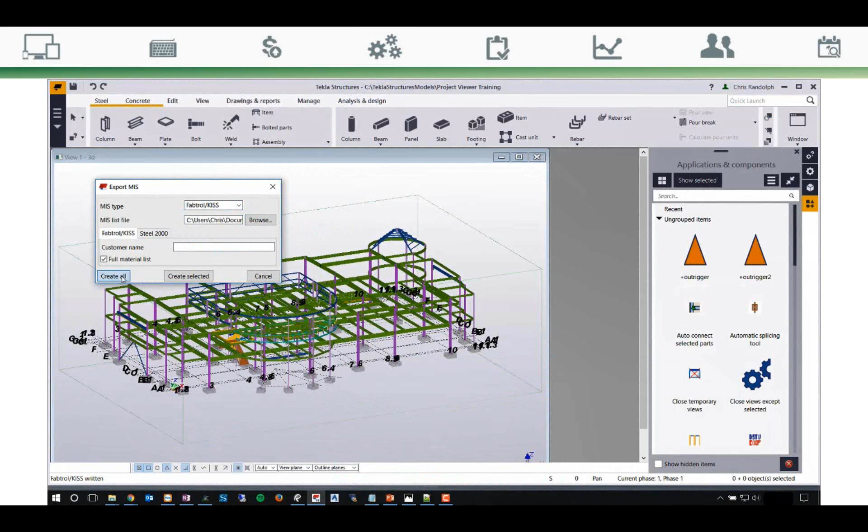We go to our file menu, select export, and MIS. We select the KISS option, and we'll save our file. I'll create all to run this on the entire model. And that's it.

Now we're going to Fabsuite and we're going to import our KISS file. We go to the file dropdown, under estimating we select the KISS format, and we'll browse for our KISS file.

When we click import, we're taken to the estimating job edit window. We'll enter some information for this project - for example, here I'm the estimator. I'm going to change our shop efficiency to 100%. If you want to change your job number, job name, any other information, you can do that here also.

I'm not using any movie magic here, I just want you to see that the import doesn't take long at all. We have a few little errors that Fabsuite found - these look like concrete pad, footing, slab, nothing that we're concerned with. So it looks like we should have a good import here.

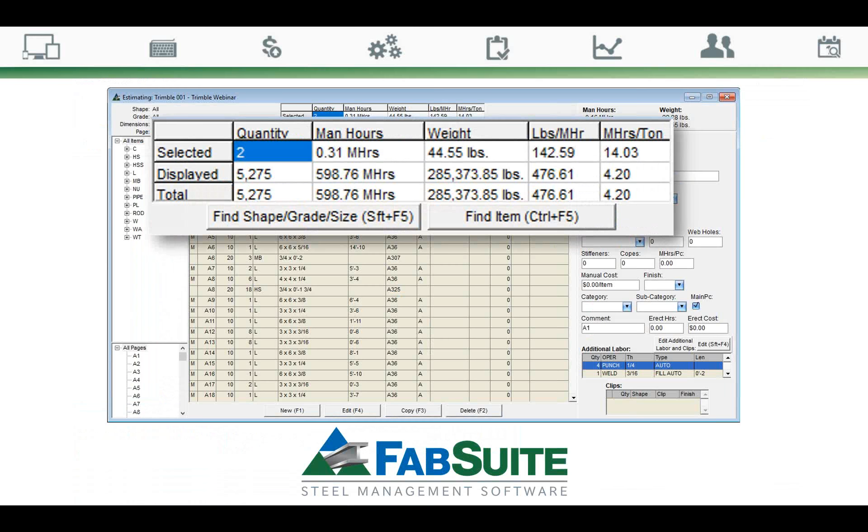If you want to see more detailed data, you can hit Control-D on your keyboard, or go to the estimating drop-down and select View Labor Details. We see a breakdown of how the man-hours were calculated for the selected material and for the job. We have time for unloading and loading, cutting, time to punch, weld, and more, depending on whatever you have customized for your shop.

Also note at the bottom right, the additional labor display - this shows what actions will need to be performed on the selected items. Because we have this information from the KISS file, we don't have to change the labor code. If you've used Fabsuite and done a manual estimate, you've probably gone in and added labor codes for the material you've added. When you use a KISS file, you don't have to, because the KISS file has provided all that labor information for you.

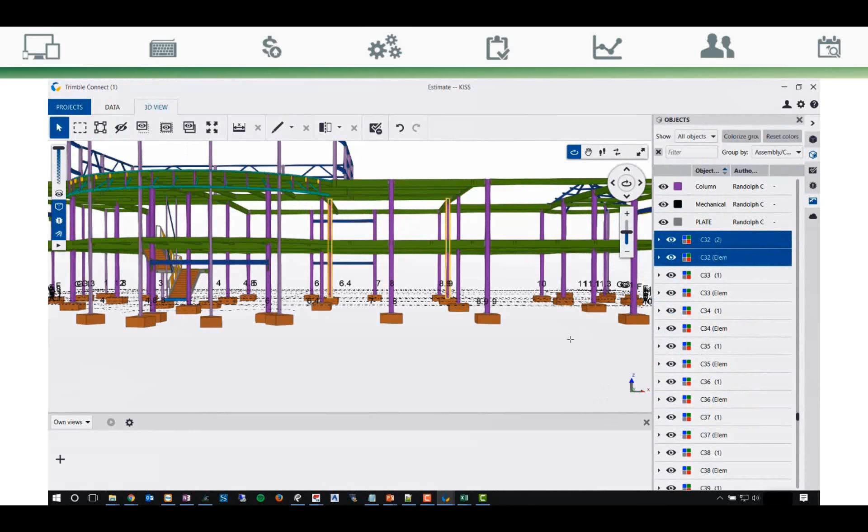All right, let's look at a member starting in the model. We're in Trimble Connect, and we're going to look at the C32 that we looked at in that little bit of KISS data. There's two columns that are C32.

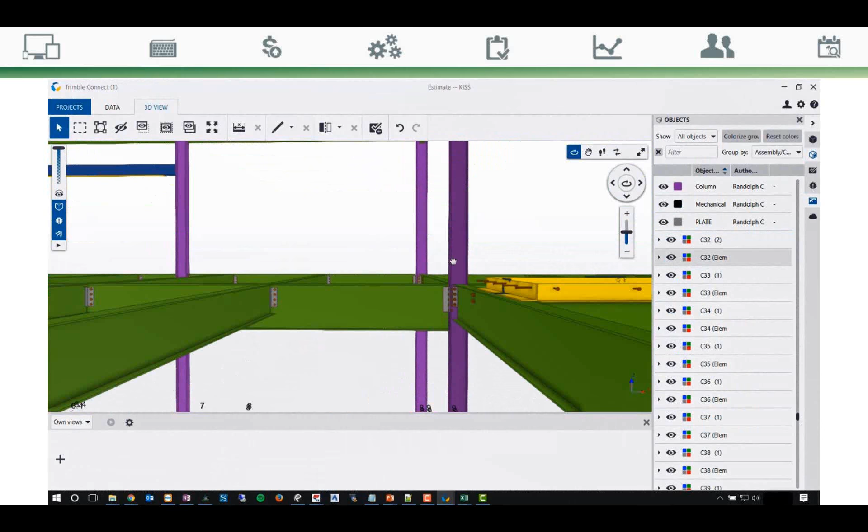We'll zoom in on one. You see you've got a base plate that's going to have 4 holes, and there's a weld. If we look at the rest of this column, we see we've got some holes in the web, holes in the flange, and some more holes in the web. There's no other material connected to this column - it's a pretty basic column.

So let's go look at our estimate. We'll filter for C32. And if you look at the bottom right in our additional labor area, you see that we're punching holes in the flange that's 9/16 thick - we've got 20 holes there. We have 16 holes in the 5/16 thick web. And we'll click down one and we see our weld where we're welding to the base plate.

So all that labor information comes from our KISS file. We also see our time estimate breakdown, so we can see how much time is estimated, including that labor data, for creating that column.

All right, once you've reviewed the data, you can generate a report for your estimate. So from the estimating dropdown, we'll select reports. We won't select any filters right now, and we'll scroll all the way down to the summary information to Excel report.

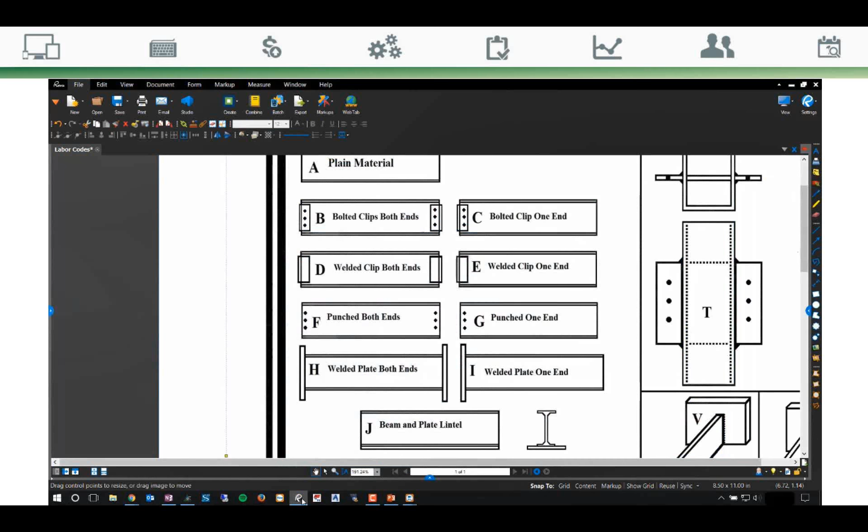Okay, much of our labor data is going to come from these labor codes, which you may have dealt with already. We've provided you this document, if you're using Fabsuite, that gives nice, simple pictures of the labor codes. So in our case, we're going to add some beams with welded clips on both ends. So that's going to be our labor code D.

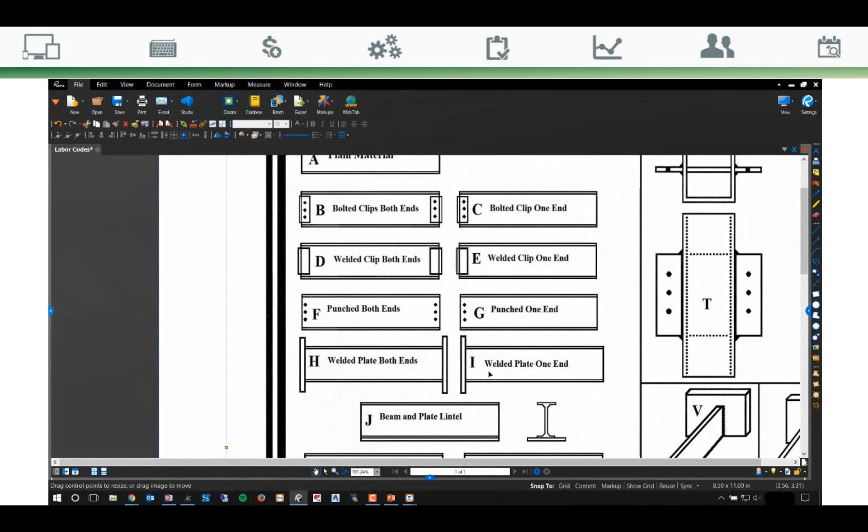We also have some columns with base plates. We'll go ahead and update those, and those will be our type I. So you could go through and select each beam and change the code. So I select this beam, change it to D. You see it has welded clips both ends.

And I could do the same thing with a column. Change that to type I, and notice your hour estimates at the top, how those change when you add that labor code. What we're going to do is we're going to use our global edit.

I'm going to change just my beams. All my beams are going to have welded clips on both ends for this estimate. Here I can change my labor code, change it to D, welded clips both ends.

There's other data I could change in here also. I could add copes if I wanted to add copes to all my beams. I'm not going to do that in this case. You can add holes, you can add stiffeners to multiple members at a time. And we have a lot of different filters to help you select the proper members. So right now we're just going to update those labor codes on the beams.

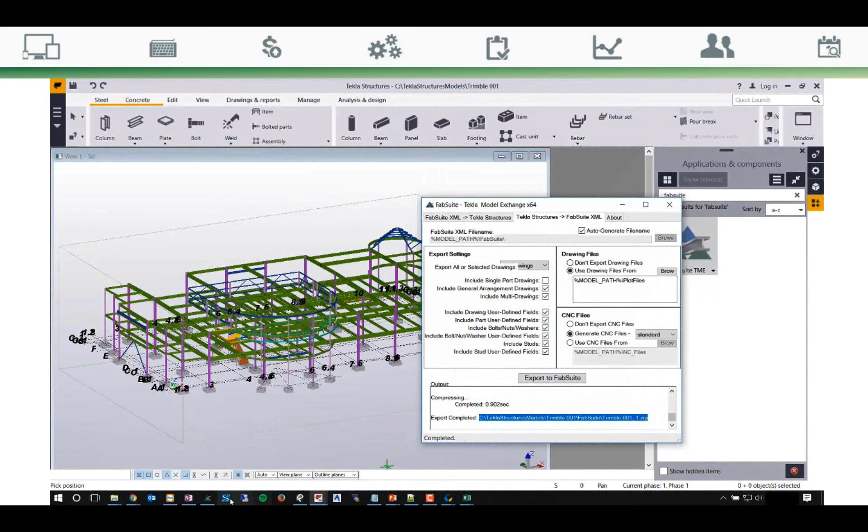We'll send a job to Fabsuite using the TME tool. You want to make sure that your tab says Tekla Structures to Fabsuite for an export. I'm exporting with drawing files and with CNC files. And just a little trick as we export from TME, once you have this export completed and the file location, you can select that and hit Control-C to copy that, just so you don't have to browse for that file once we get into Fabsuite. Just a little time saver.

So to import into Fabsuite, we'll select the file that TME created. I'm just going to paste it now and import. Right, notice Fabsuite has read the job name from the file, and it's created a production job, and it gives us the option to create a project management job. We're going to do that also.

When it's finished, now we'll look at the drawings in project management. You can double click on any of the line items. As long as it had a drawing come in with it, you can view those drawings from within project management. Just a quick note, in project management, if you're not familiar with Fabsuite, you can also manage a lot of other aspects of your job, like your transmittals, RFIs, drawing revisions.

So now we're going to production control, and we see the bill of material information that was sent by Tekla. If we double click one of the bold lines, it'll open that drawing.

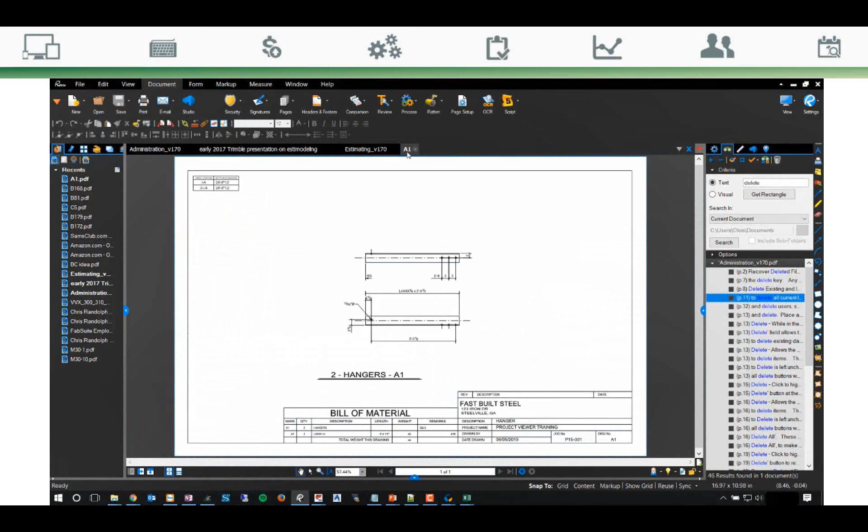We also got our CNC files sent by Tekla. And if you have a viewer on your workstation, you can view those files from here. The CNC files, just another little side note, those allow Fabsuite to calculate proper weights for each piece.

All right, so my shop's been pretty busy in the last few seconds. I've used some movie magic this time, and I've already run some of the steel that we've imported through several stations. We've even loaded some on trucks and shipped them to the job site. So let's look at our production status. From the production control drop-down, we'll select Review Production Status.

We've run all of the first sequence, or phase 1 in this case, through all the stations, and we've shipped it to the job site. So all those show up in green. The other sequences, as you can see, are in different stages of production. Some have been cut, some have been through paint, and some are done and just waiting to be loaded on a truck.

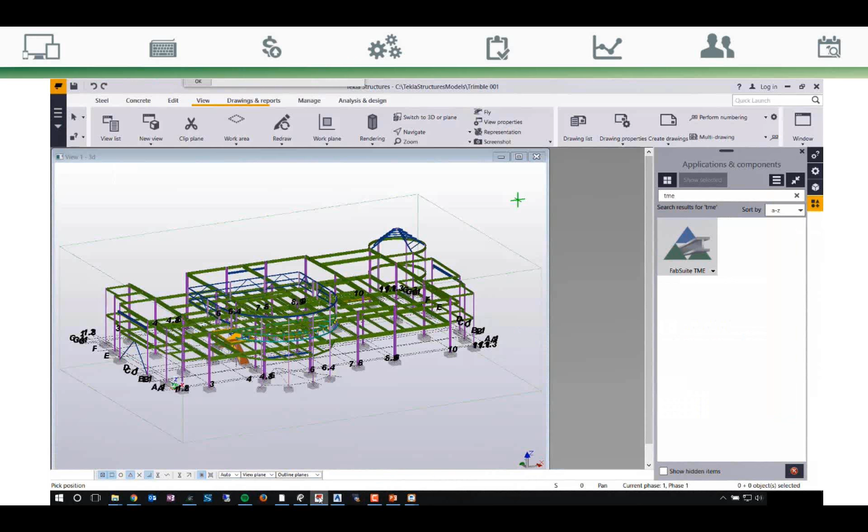All right, now we're going to send our status back to Tekla. So exporting the data, it's a simple one-step process. We're just going to export this as a Tekla XML. So back in TME, in Tekla, we'll change our tab to the Fabsuite to Tekla option, and we'll browse for the file and import it.

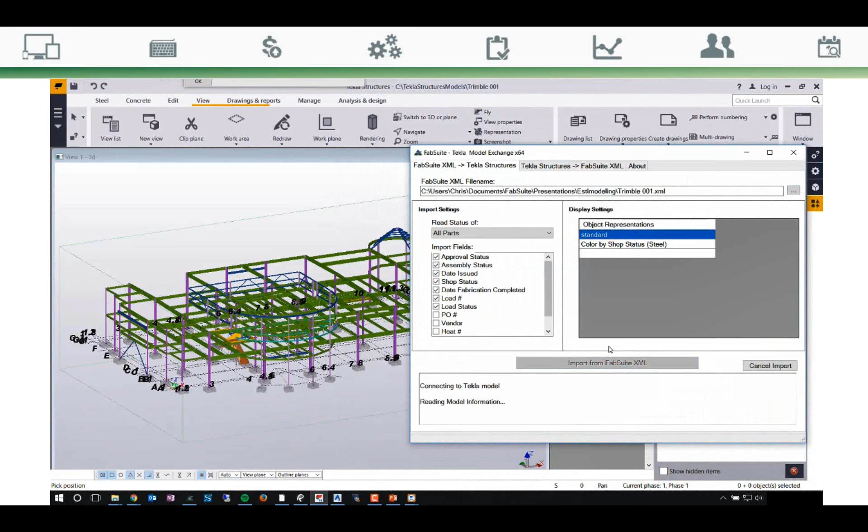Okay, TME shows us the objects that have changed in yellow. You can review these updates to make sure you're seeing what you expect. Then you click the Update Model button. And once it's done, the list will refresh and the yellow will be cleared.

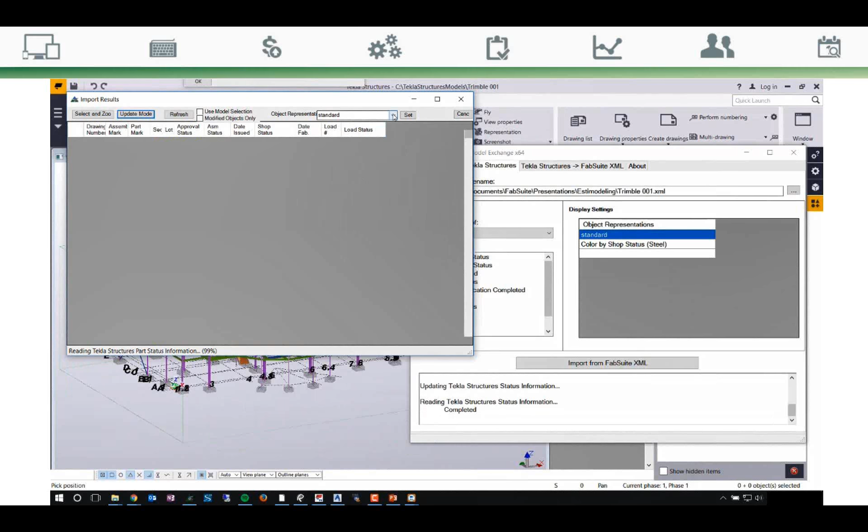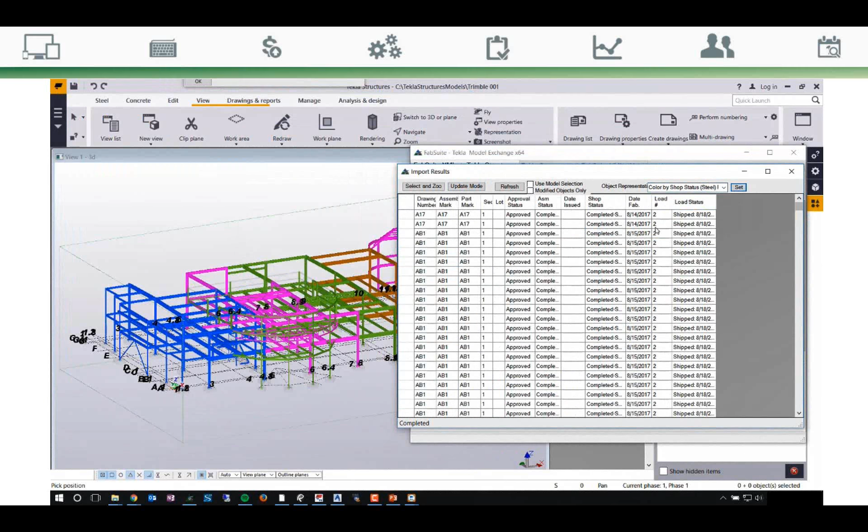Okay, from the Object Representation dropdown, I'm going to select the Status Color option. I've created our own for Fabsuite. I'm going to select the default here. I'll explain this more here in a little bit. I'm just going to manually change this and add Fabsuite to the end. And I'll show you that here shortly. We'll set that, and it brings in my custom colors that I've set up for these statuses.

So we see that in dark blue is what's been shipped, and the other colors represent the different stages of production. In our object representation settings, my settings are already loaded, but I'm going to show you where that came from. This color by shop status steel Fabsuite setting, I created that to match my stations in Fabsuite. We have instructions on how you can set this up in your Tekla station in the Fabsuite Customer Hub under How-To articles, or you can contact our support department and they can get those instructions to you.

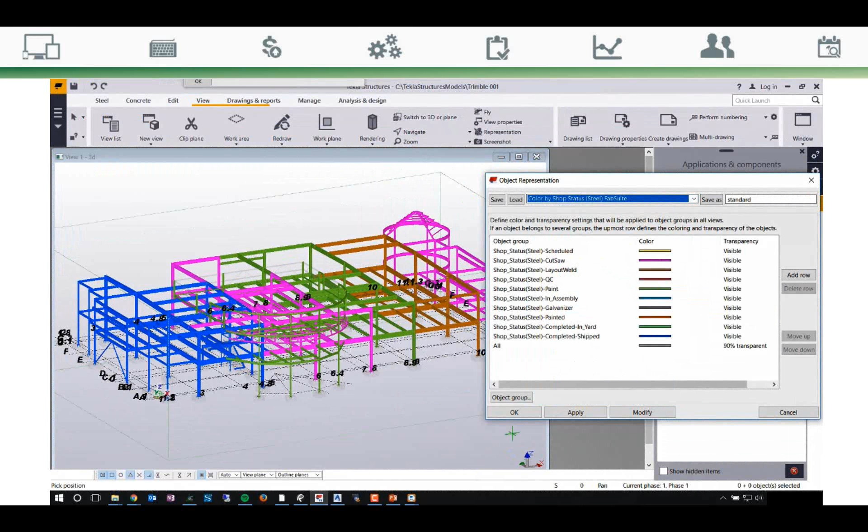So our TME import list can also interact with the model. So if you select an item and click Select and Zoom, that piece will be highlighted and centered on the screen. So as you're reviewing this list, if there's something you're not sure about, you can easily zoom to that piece. If it's on hold, if you're looking at approval statuses, if it's not in the station you expected it to be, you can review all that information here.

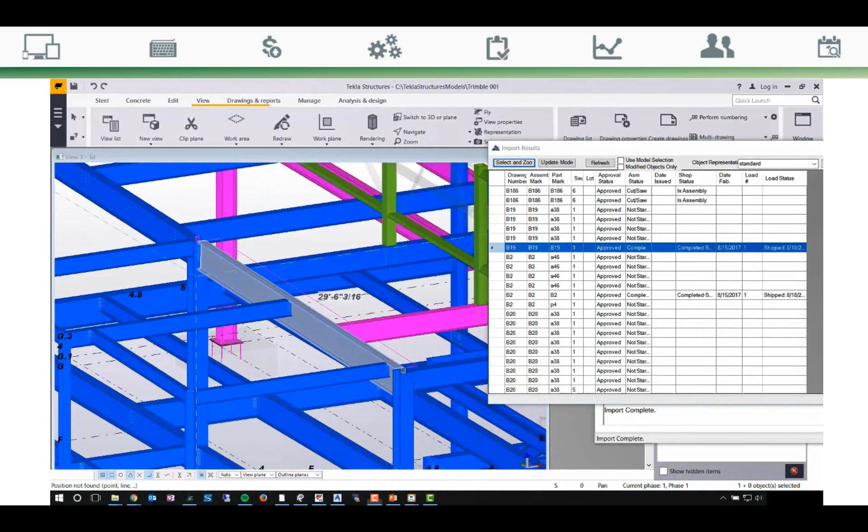All right, well, I hope this quick run through of what Tekla and Fabsuite can do together has piqued your interest. I know we've just barely gotten our feet wet here in this presentation, but if you'd like to discuss Fabsuite integrations more, you can reach me through integrations@fabsuite.com. In addition to Tekla, we integrate with the systems in your shop, like Steel Projects, Voortman, ProNest, SigmaNest, Steel Solutions, and Bluebeam, just to name a few.